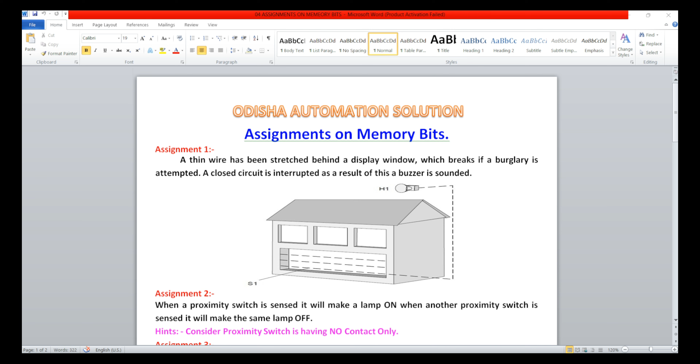See, when a proximity switch is sensed it will make a lamp on. When another proximity switch is sensed, it will make the same lamp off. Consider hints given: consider proximity switch is having NO contacts.

Proximity switch having NO contacts only, NC contact is not there. If he will give the NC contact, you can easily turn it off. Only NO contact is given, NO contact means for turning on. NC is off, off, on, off. NO, NC: normally open, normally close.

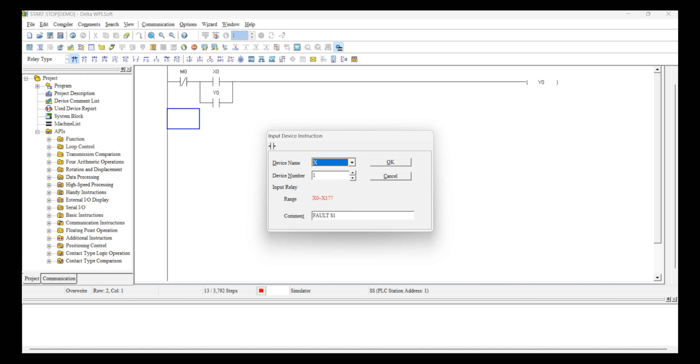After that, this is the sensor. And this is the output light. Latching. Then another switch, given another switch, another switch.

Okay, go to compile, simulator on, download, online mode, download the PLC.

See the program: when a proximity switch is sensed, it will make lamp on. When another proximity switch is sensed, it will make the same lamp off. Consider proximity switch having NO contacts only. Here X0 is a NO contact, X1 is a NO contact, no other NC contact for this sensor.

See how it is working. This is a sensor, I am activating it. See, when sensor is on, the output light is glowing, then off through latching. This is working. Another sensor will activate, meaning that time the light will glow off. See, on. See, the light de-energized.

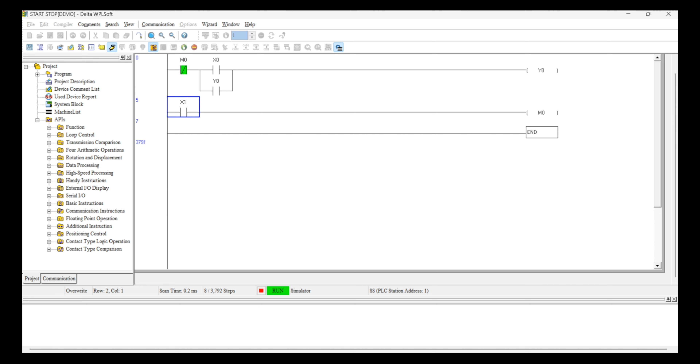For like this, we have to use the memory bits.

Another program. When sensor S1 is made on, the lamp B1 should glow. When sensor S2 is made on, the lamp B2 should glow. When sensor S3 is made on, the lamp B3 should glow. When sensor S4 is made on, the entire lamp should off.

Consider sensor having NO contacts on this, same NO contacts given. Here three lights are there. One switch, three lights. And S4 switch made on for all off. See the program.

This is the switch S1. This is the lamp B1. Let's see.

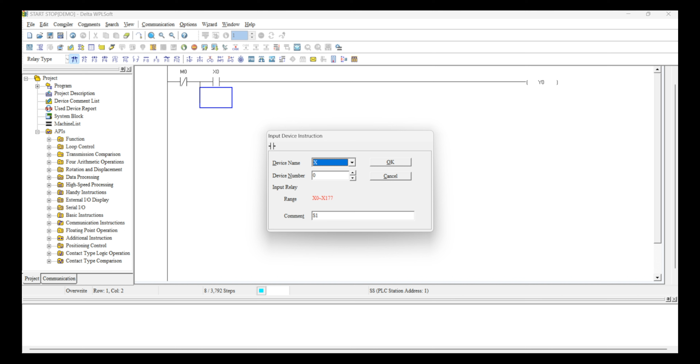Then another switch X1. This is the S2 switch. For that, B2 lamp, latching.

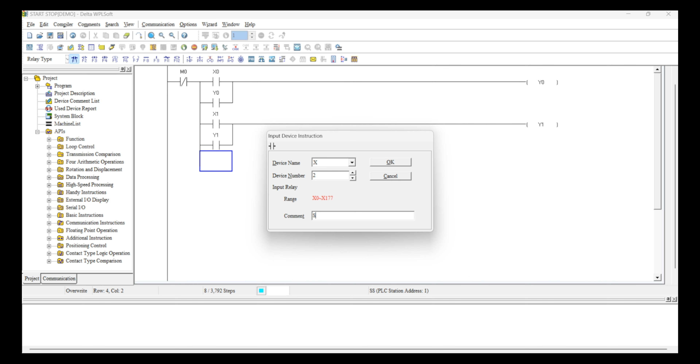Latching. Same for the third number switch. This is the S3 switch. This is the B3 light. Then latching.

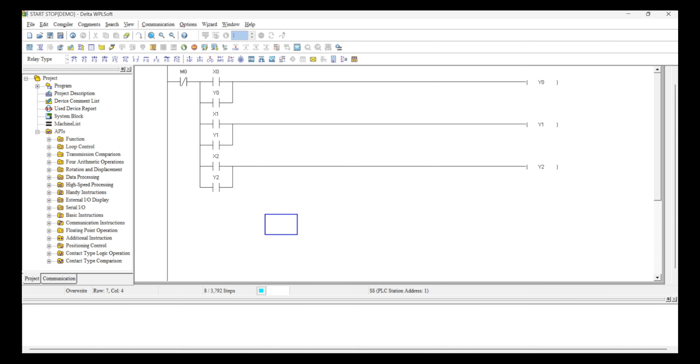For one switch, one bulb. Then when S4, see S1, S2, S3, B1, B2, B3. When sensor S4 is made on, the entire lamp should off.

See, this is the S4 switch. S4 switch, you have to turn off the entire lamps.

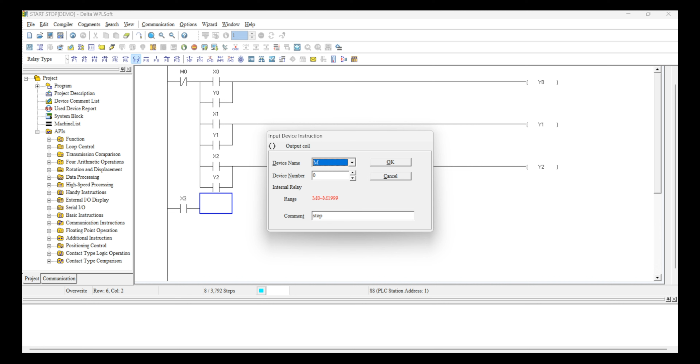Save, compile. Simulate. Communication. Online. Run the PLC.

See, one by one. S1 is on, B1 is glowing. I am releasing. And again S2 is on, B2 is glowing. When S3 also on, it's glowing.

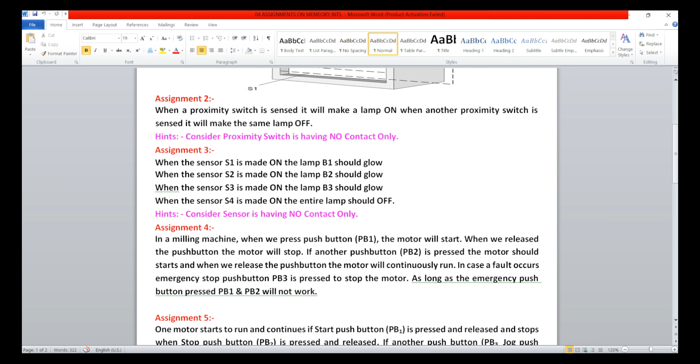When S1 is made on, lamp B1 should glow. When S2 is on, lamp B2 will glow. When S3 is made on, the lamp B3 will glow. Same. When S4 is on, that time entire lamp will off.

See, entire lamp should off. See, entire network means entire lamp now in off condition.